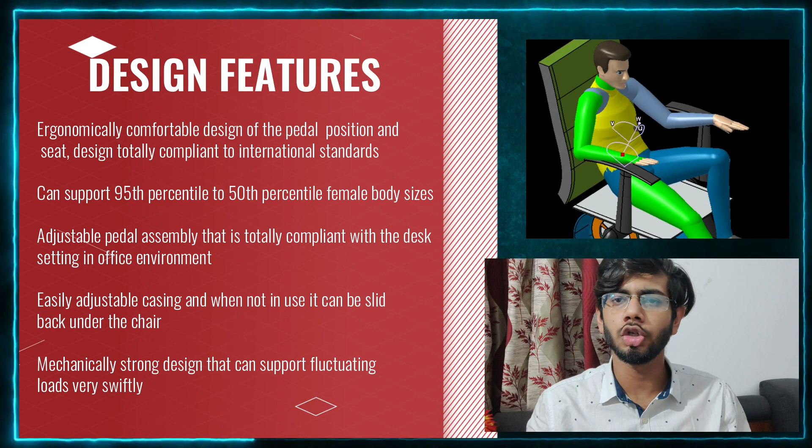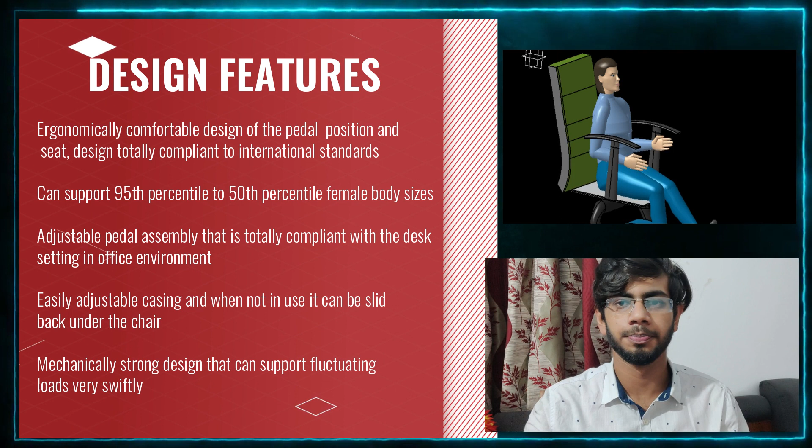The very first feature here we can see is the ergonomically comfortable design of the pedal position and the seat, where the designs are totally in compliance with international standards. It can support 95 percentile to 50 percentile of female body sizes. We also have an adjustable pedal assembly that is totally in compliance with desk setting in an office environment.

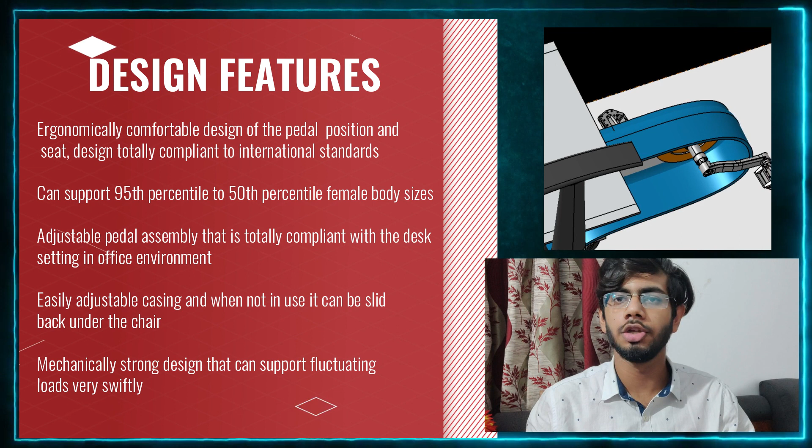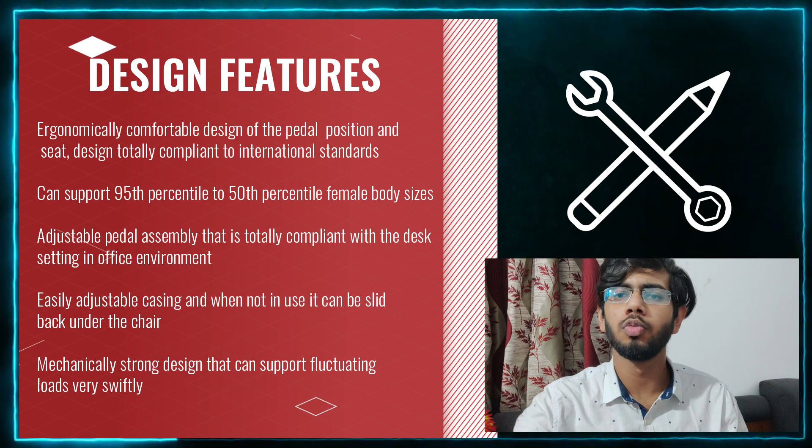Easily adjustable casing, which when not in use can be easily slid back under the chair, has also been used. A mechanically strong design that can support fluctuating loads very swiftly has also been incorporated. Now, one by one, we will explain each of these components, the design methodology used, and how it aligns to the project goals.

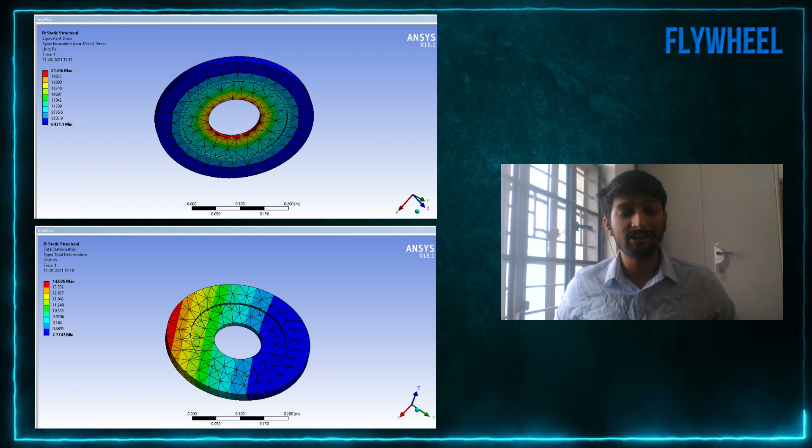We have calculated the torque applied by the belt on the flywheel by considering 150 watt power generation by the user. The tight side of the belt will have a tension of 450 Newton and the slack side will have 300 Newton of tension. Using the Timoshenko's equation, we found that each of the spokes, there are 4 spokes, will have an axial loading of not more than 5 Newton.

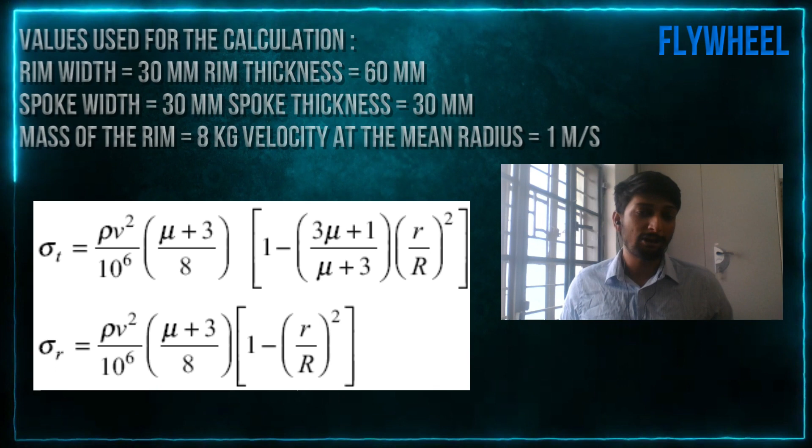On the screen here we can see the values used in the calculations, and here we can see the iterated design that has 4 spokes. This design was further passed through finite element analysis, carried out by introducing peripheral load, and we simulated the bending of the component.

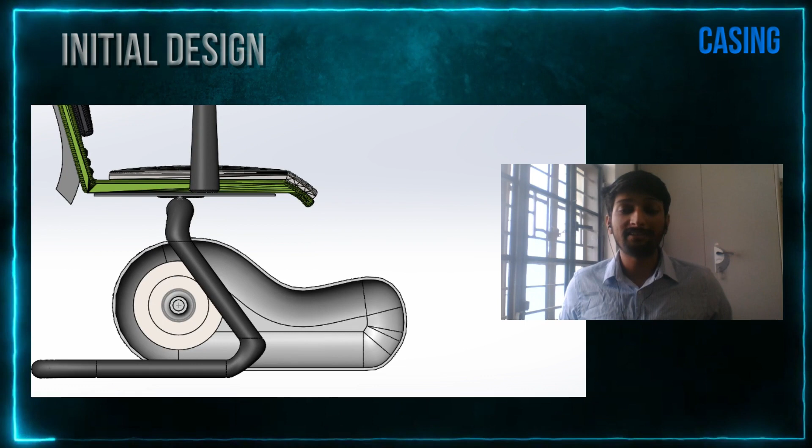Here on your screen you can see the very first iteration of the casing, which is far from being a space efficient design. Space analysis was not done till then, but this somehow gave us a starting point to proceed and optimize further.

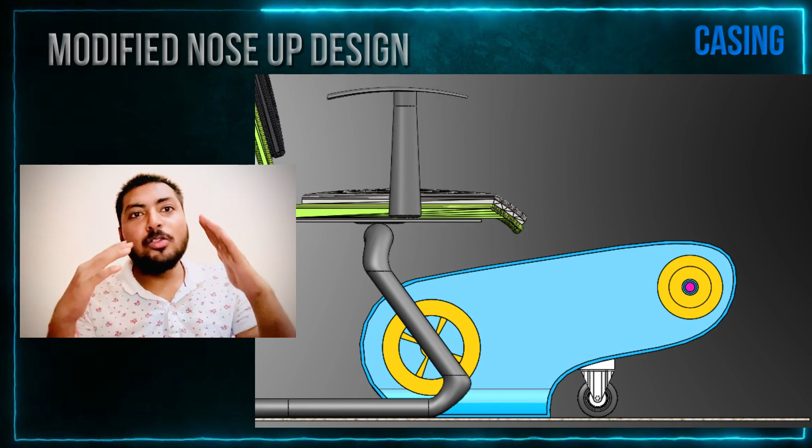After that, we modified the curvature of the casing to lift the nose up. This also facilitates the correct posture of the user. The design is much more efficient and spacious than the earlier one, made more efficient by trimming out the radial spaces.

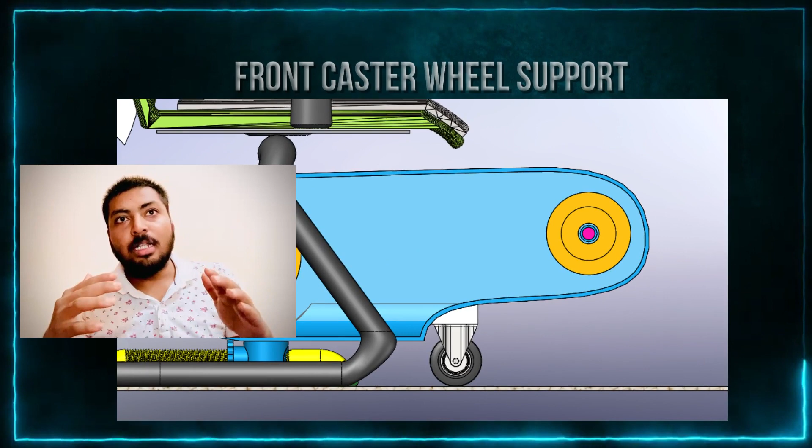There has also been a provision of an integrated caster wheel attached to this design. Here you can see this caster wheel attached to our casing on the front. The integration of the wheel facilitates smooth operation by the user to a very great extent.

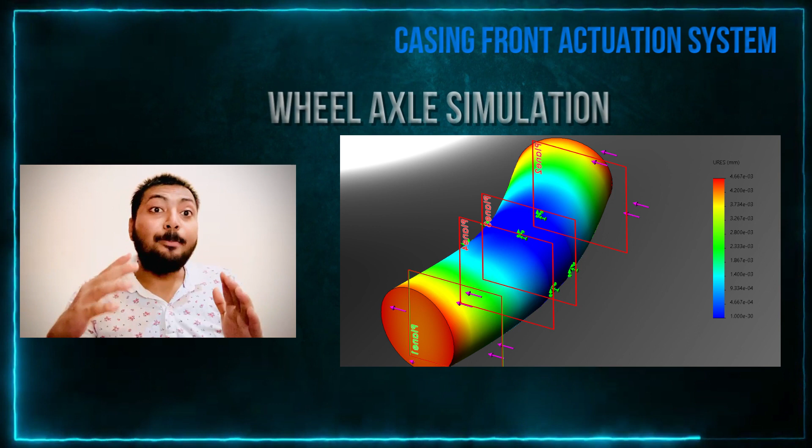Axle and other dimensions have been made in such a way that it can bear the maximum load. This type of wheel is very quick in operation and also reduces frictional losses. The caster wheel has been integrated by an extrusion from the casing itself.

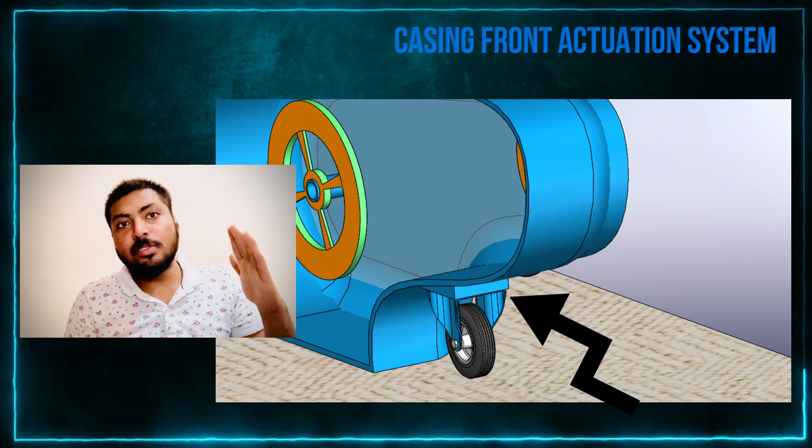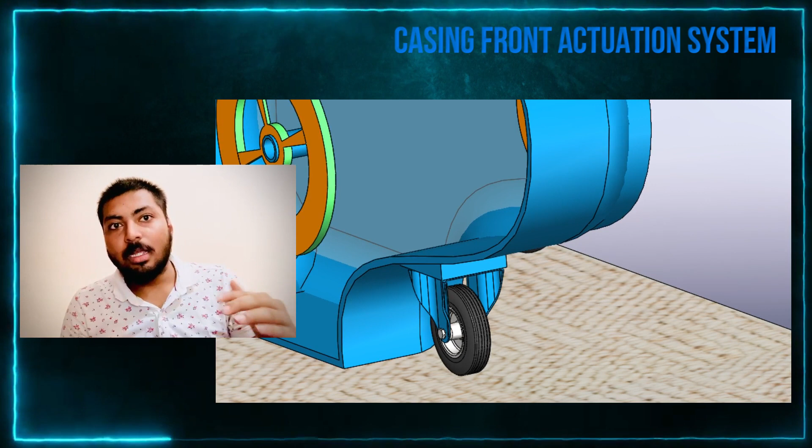To make our product with a minimal number of fasteners, we have modified the casing itself to act as a mount for the wheel. This is a simulation of the caster wheel axle bearing the load of an 80 kg person standing upright on the pedals. The dimension has been chosen to bear the loads with enough safety factor, and the visualization of loads has been very well explained in this diagram.

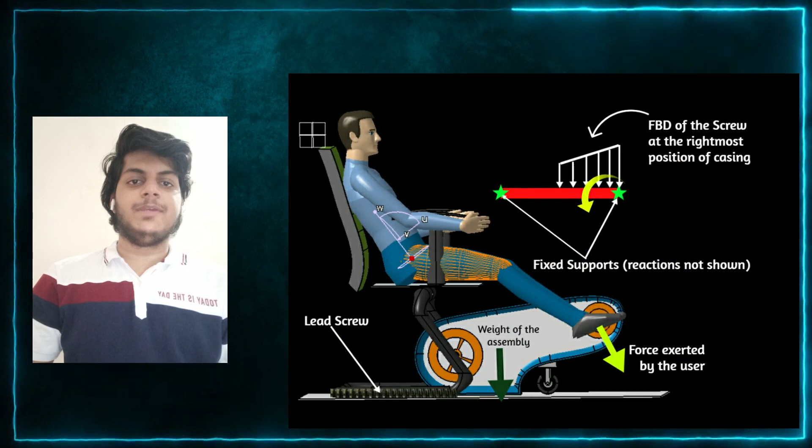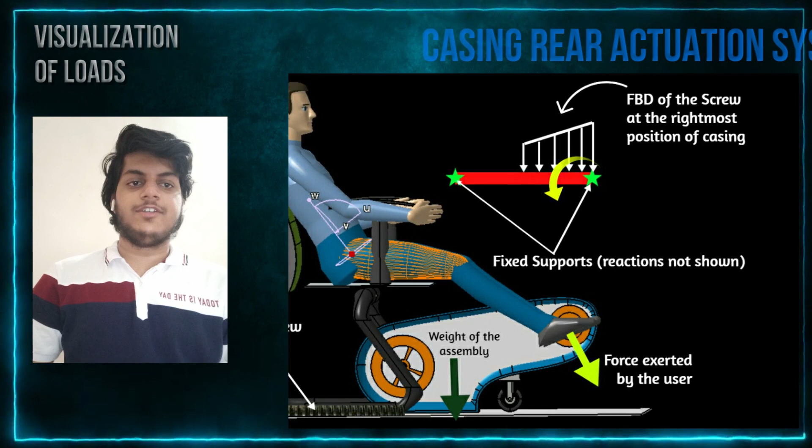As we can see, the supporting screw of the casing faces a distributed load that has been considered triangular for calculation convenience. There is a perpendicular load on the screw and also a bending moment. These considerations have not included the fluctuations of load due to pedaling.

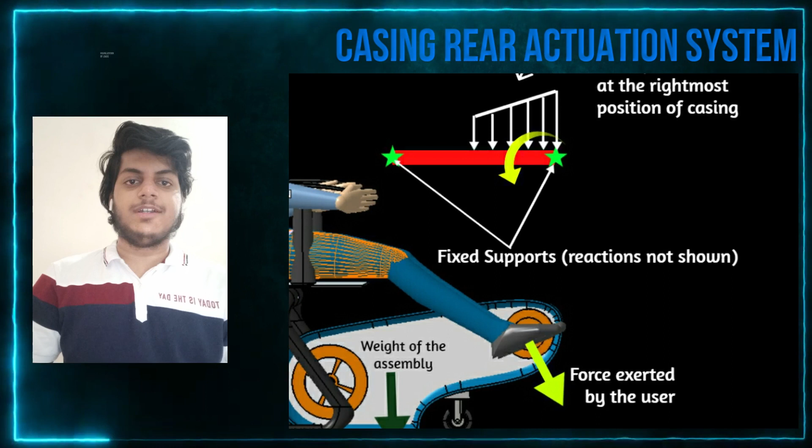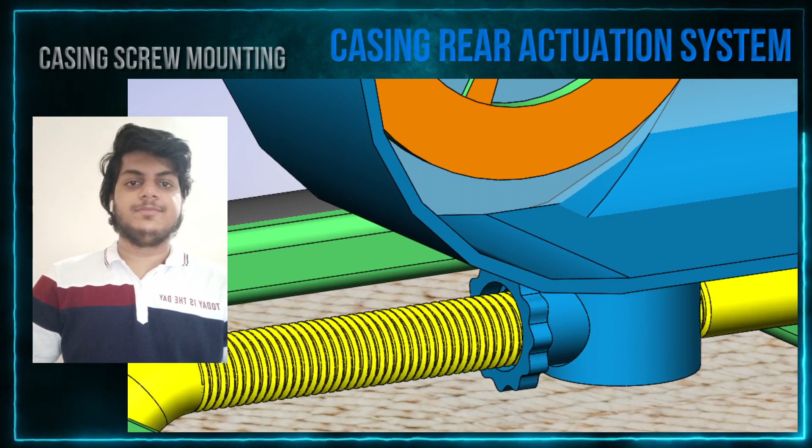Here we can see the lead screw that acts as a rear actuation system of the casing. This is the base frame of the lead screw that ensures the loads are transferred to the ground optimally. We also have raised the screw to have some clearance for nuts to move forward and rearward. We can see the nut here that acts as the casing screw coupler.

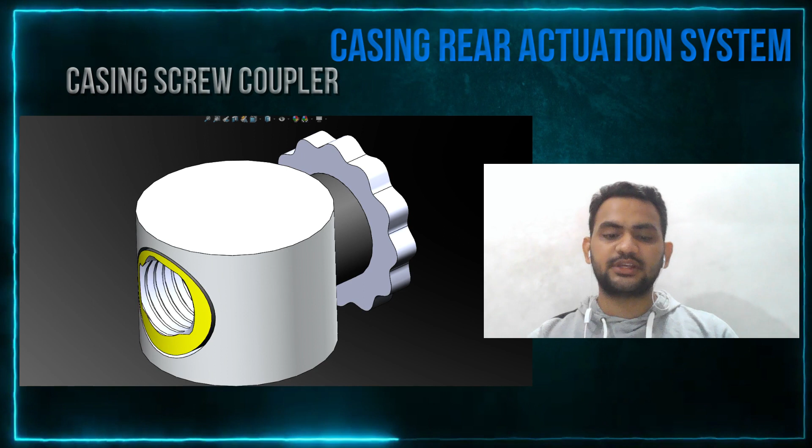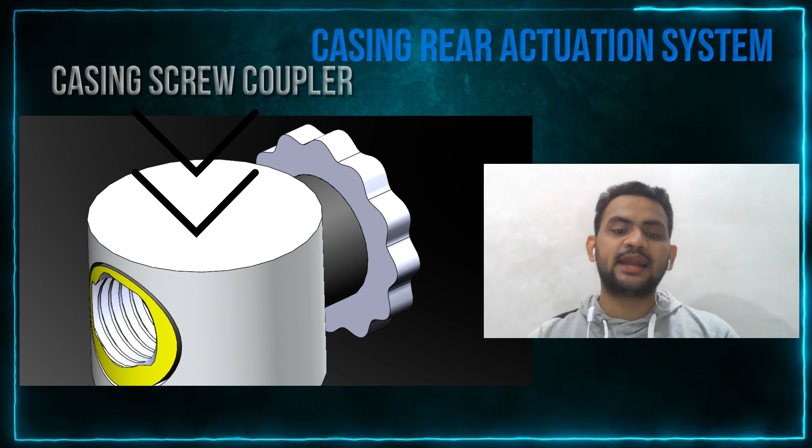Various design calculations were done to design the nut and screw in total, namely: first, permissible compressive stress of the screw due to axial load, which has already been calculated for the first iteration. Second, permissible bending stress. Third, permissible shear stress, due to the transverse loading from the operation load and the weight of the casing. And the fourth is shear failure of the screw's root faces due to the rotation of the nut.

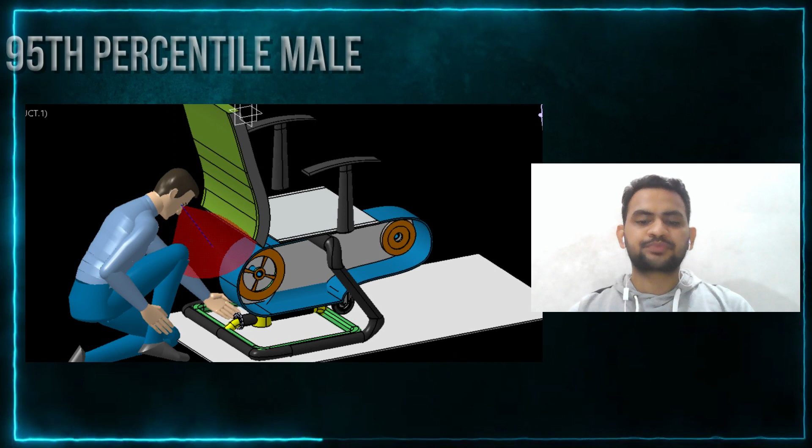We designed a modification in the lead screw nut. This modification has been done to design a star type hand wheel that actuates the lead screw mechanism. A ball or roller bearing will be inserted between the concentric cylinders so that relative rotation is possible.

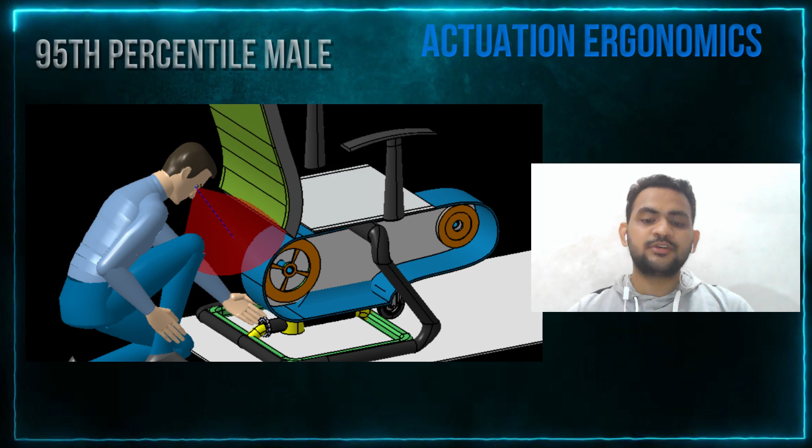We also worked on mannequin testing of the hand wheel operation to verify the locations and ensure that they are within the full range.

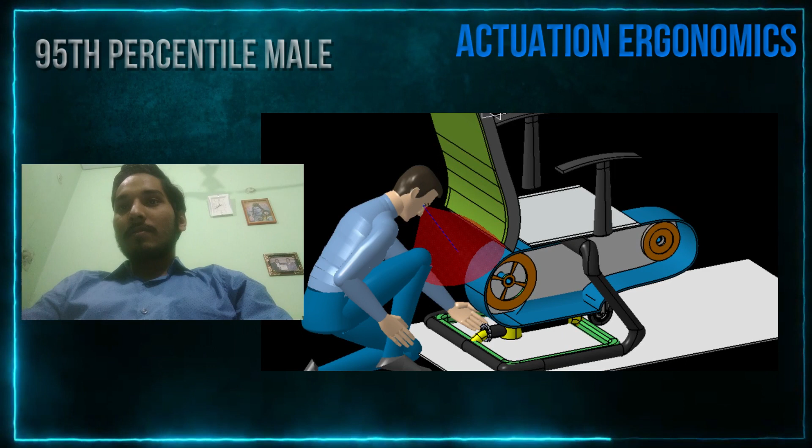We found out that the lead screw height should be increased by at least 10 mm for comfortable actuation, because in the present dimension the arm is straight, which causes major fatigue, and also office workers do not wear loose dress, hence a 180-degree opening is a little impractical.

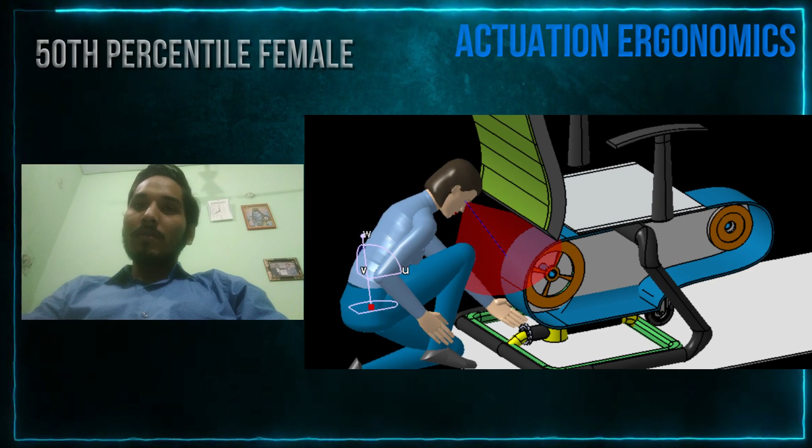We also tested the product with a 50th percentile female. Vision window of the operator shows that the hand wheel is half visible in the present design.

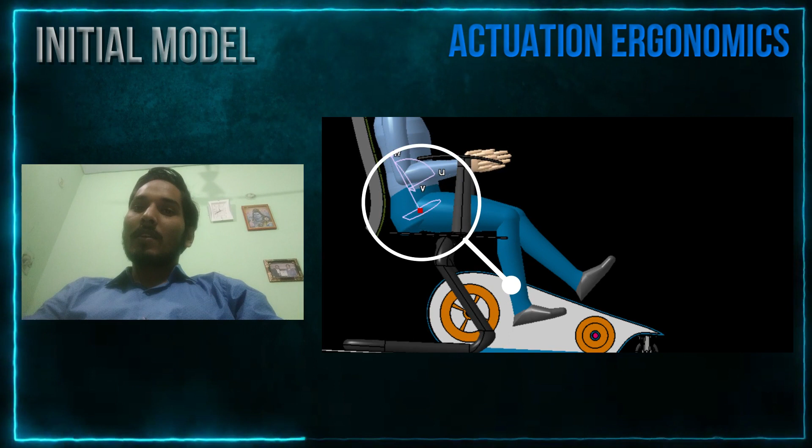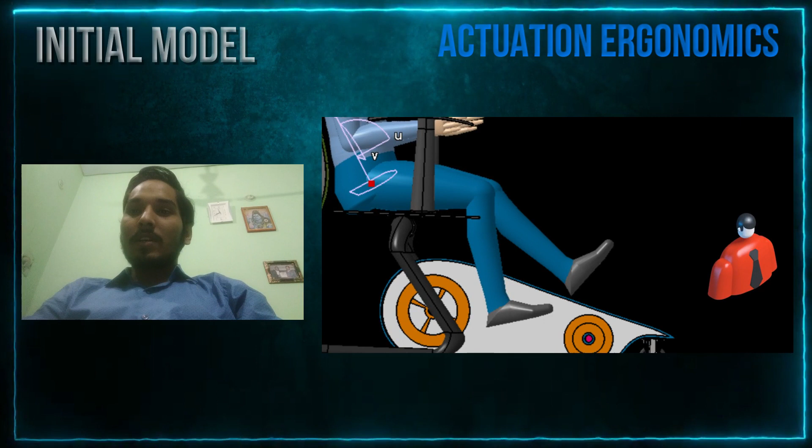We further simulated the product with a human model to check and collect data regarding various aspects. Naming some: first, extreme reach point of the foot, radially farthest and nearest. Second, width of the bottom for a 95th percentile male, so that a proper seat can be designed to accommodate the user optimally. Third, head height of the user, including the 50th percentile female and 95th percentile American male. And the last point is clearance between the foot bottom and the datum.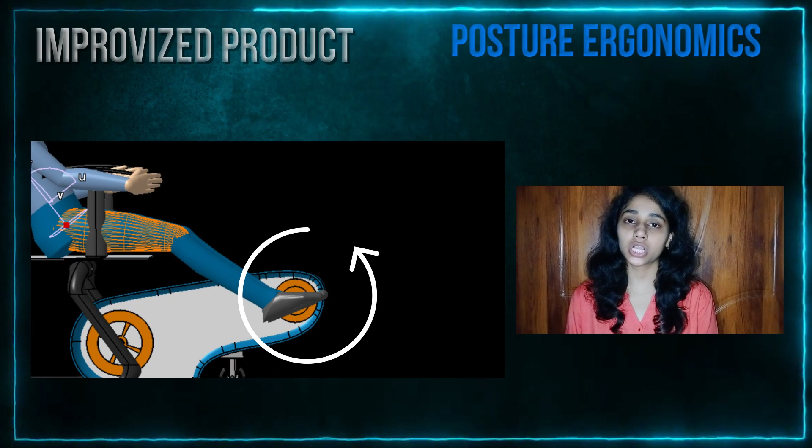We successfully ran the RULA simulation to ensure that the posture is under industry accepted standard. We are very happy to share that the posture is well compliant with the international RULA standard. RULA pigments on the mannequin's body clearly show there are no red zones, hence the product is comfortable even in exercise mode.

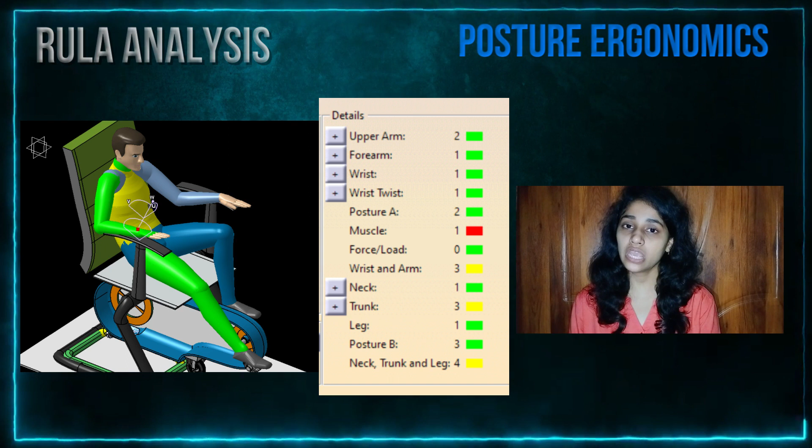We worked on the design and analysis of the chair frame. The chair frame orientation is constrained by the mounting requirement of the casing. Hence, we can't go with a four-legged or side-by-side inverted C-shaped leg. We have decided to move ahead with a double C orientation, which provides the provision of a mounting lead for the lead screw.

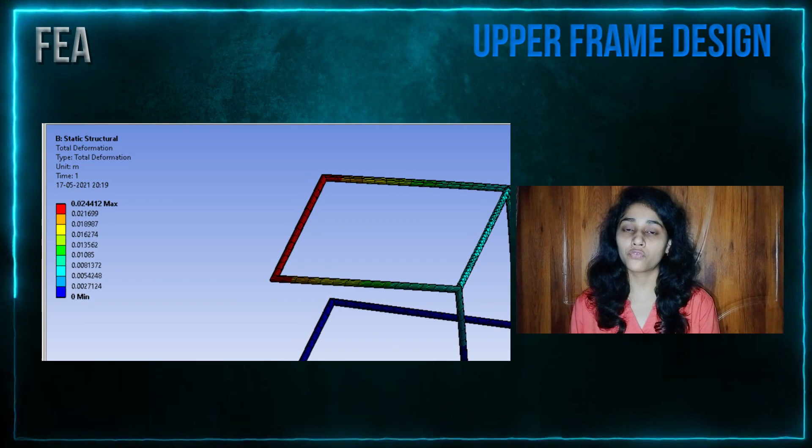Lastly, we integrated the pedal assembly into our product, as it ensures degree of freedom and a reach envelope for the user's foot.